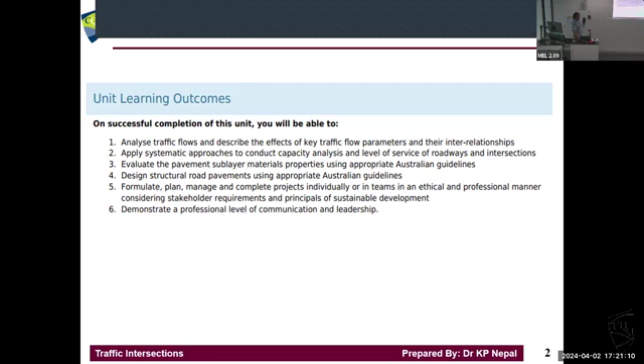What we did until today is we finished our uninterrupted flow analysis, right? Level of service, capacities, multi-lane roads, and two-lane highways. From today, we will start the interrupted facility. We will be designing and analyzing intersections. Designing is a little bit easy, I don't cover that, so I will go for the analysis. So let's learn quickly about intersections first. In terms of learning outcomes, intersections are part of our analysis.

So what we cover is we try to understand what are the types of intersections. Of course, we have seen, right? We have traveled along the roads. We need to understand the traffic conflicts because they are so important to predict crashes, right? Yeah, road crashes and accidents. And then a little bit of the layout process and the sight distance requirement as well as operational analysis.

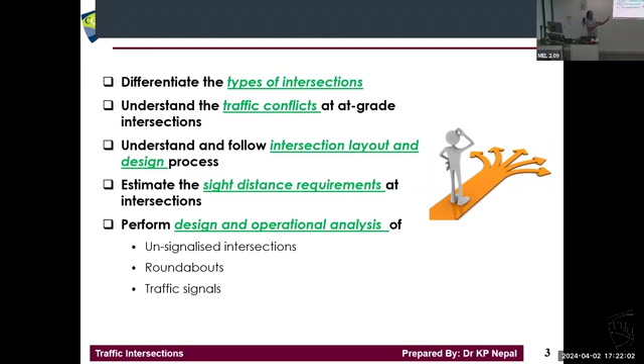So unsignalized intersections, roundabouts, and traffic signals, right? So we will cover only unsignalized intersections this week, and traffic signals and roundabouts we will be doing in week 6. After that, we leave traffic and go for pavement design. Is it good? Yeah? Let's go.

All right. What are intersections? How do we define them? When two or more roads meet at one place. Sometimes they cross, sometimes they just meet. So why do we need those? Because we need the change in direction of the traffic. They want to go left, they want to go through, continue, right? So we need the intersection to change the directions of the flow of traffic, from one to another.

So intersections, in America they call them junctions, right? That's why I put that as well, the terminology. It depends on how many roads are joining, how we design and analyze. Also the type of control: roundabout, signals, unsignalized. And then how we treat the right turning and left turning movements, and if we put a little bit of barrier in between to separate different types of traffic flows.

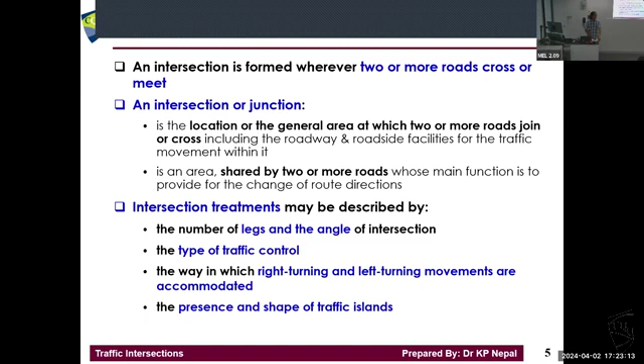We need intersections, right? In the cities, the intersections control the overall capacity. In the rural areas or on the freeways or highways, traffic flow on those uninterrupted facilities controls the capacity. So in the cities, of course, at one intersection you stop and then go to another, and we want all intersections to move very smoothly, but it's not always possible because of the traffic.

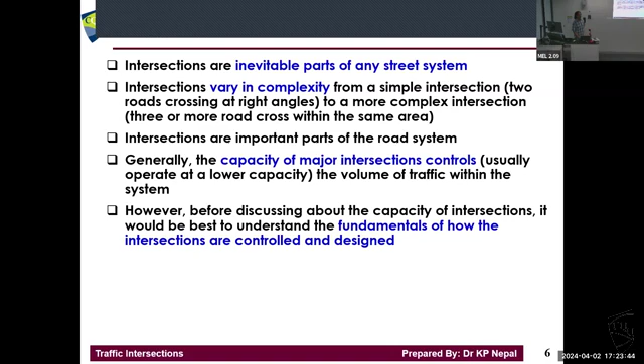So next is at-grade intersections. Depending upon the number of legs, we call it a cross intersection, where they cross at one place. T intersection, or the Y intersection, when one road meets the other, and then multi-leg intersections, where there are more than 4 roads meeting. That will be complicated. For safety, please don't design those types of intersections. It's really bad. More than 4 roads coming is not good.

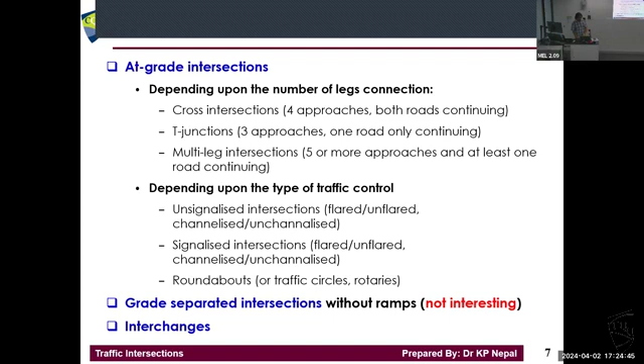Depending on the type of control: unsignalized, there is nothing, just a give way and right of way rule. Next is signalized. We have signal indications, green, red, and yellow. And then we have roundabouts. In America, they call them traffic circles or rotaries. Those are the terminology; we call them roundabouts here. That's the first. And then second is grade separated intersections and interchanges.

These are at-grade intersections, right? At the T, one road is continuing, another road is just meeting. Why? Oh, please don't do that. Why is that not good? Because of the sight distance and turning. It's so hard. For example, coming from that, turning to that would be really difficult, right? So try to make the angles as close to 90 degrees as possible.

Sometimes with the cross intersection, make this angle 90 degrees. Even at 40, make it 90 all the time. Either 90 or don't make it too low. Maybe in Australia we say more than a 60-degree angle is okay, but oh, come on. That depends on the safety objective.

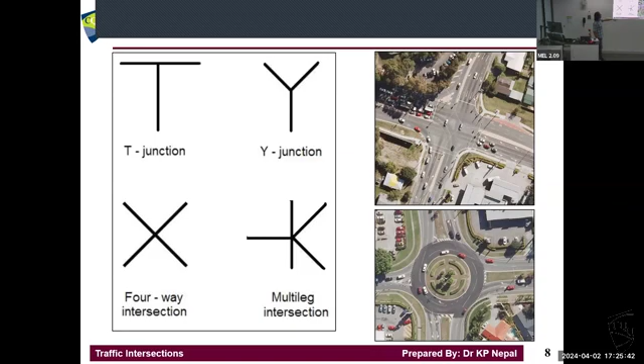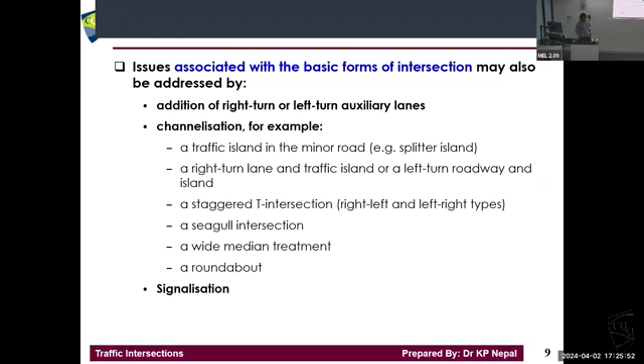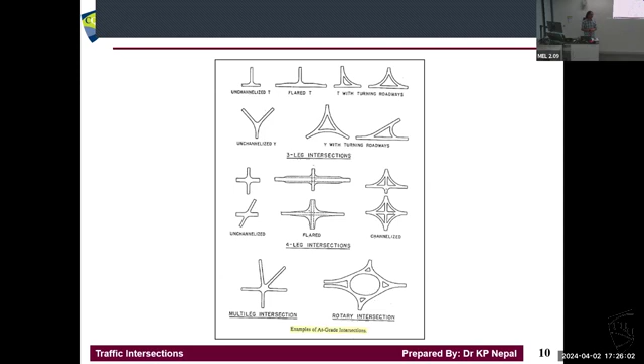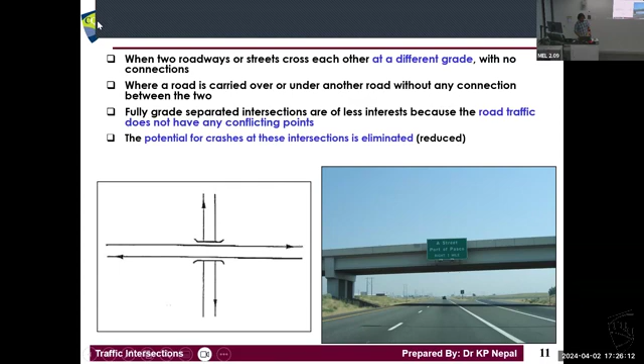All right. Second type, we call it, why is it not showing at the top? Something is blocking, yeah? No heading, right? Very fun. It's coming. I think it's not perfectly sharing. I don't know what's wrong, but there you go. Somebody put a comment in the chat, yeah? I want to see. Okay.

There you go, right? Grade separation without ramps. Ramps means the connection between two roads, right? To easily transfer from one to another. But if there is no ramp, what is this here? This is just a bridge above another road. We are not interested. Maybe structural engineers are interested, but not us, because there is no traffic meeting, right? It's just the roadway only.

This looks a little bit terrible. I'm not sure where I put that. It's blocking. Did you see at the bottom, as well as when I move to the top, it's also blocking? Yeah, okay. Got this. All right. Let's move on.

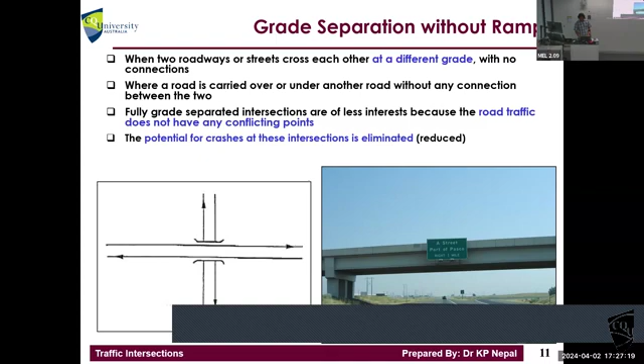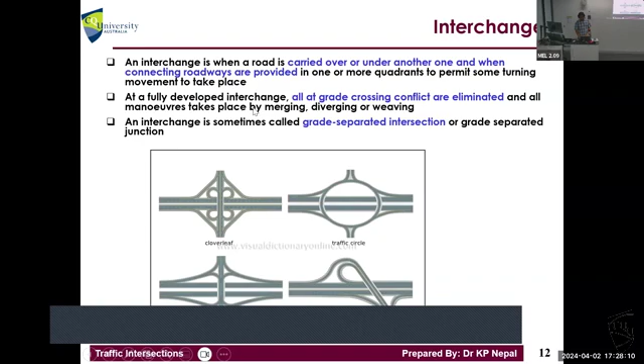These are important for us, but mostly it's structural engineers who need to design the bridges. These are the terminologies for the different types of configurations of interchanges. We're not going into that detail, but we already know about entrance and exit, look at this moving.

Sometimes, look at this, we call these trumpet intersections. When do we use that type? So there is a bridge, right?

You can see there, I want to indicate here, but I can't. I need a mouse. Do they have one? No, they're linked to something. I want to indicate something, but I didn't know this would happen here. If you see here, there is another mouse. What is that? Okay, hopefully it works. Yeah, thank you, I didn't see that. There you go, hopefully it works.

Okay, here we go, there is a bridge, I indicated there, so they are not meeting there. But if there is heavy traffic, for example turning right from there, we try to separate above the bridge, isn't it? It depends on the amount of traffic.

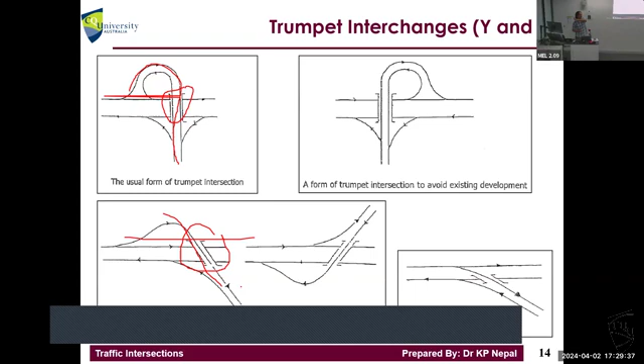So different configurations, for example here, there is a bridge. But did you see here, right turning traffic, they have a direct bridge crossing, there you go. For example, the roads there go above the road and then turn in the right direction. Those type of stuff here.

Okay, so now look at this. Why do we use different types? Can you guess why we separated here, not at other locations? Because these two flows coming from that side, this is also not that good.

You see? Oh, I wanted this. Yeah, from here, look at this, it's so sensitive, it's just moving without me touching it. From that coming down, as well as from here turning right, from the left to right, there are heavy flows there. We try to separate that, otherwise there will be big congestion there.

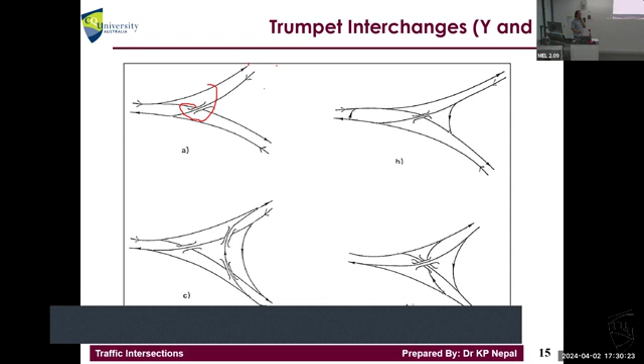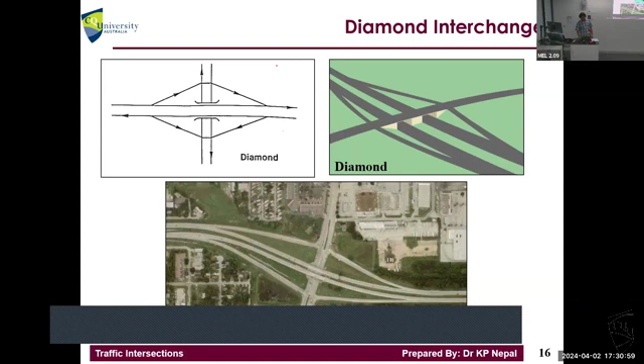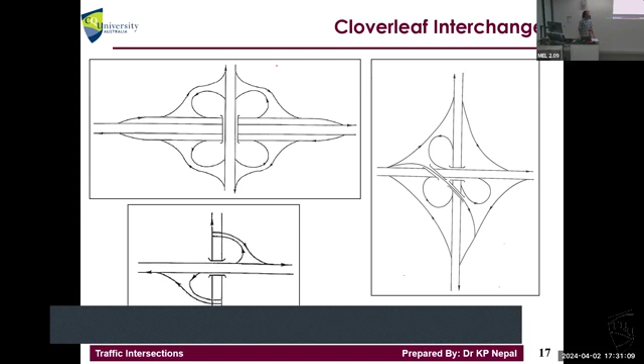You see, cloverleaf is another type. This is the full version, that's only one third, but there is one direct movement above the bridge, as well as other types there. You see how much space we need for that? This allows complete freedom to maneuver anywhere without crossing conflicts. They can merge, they can diverge, but without crossing there. These are just the basic ideas about the type of intersections, alright?

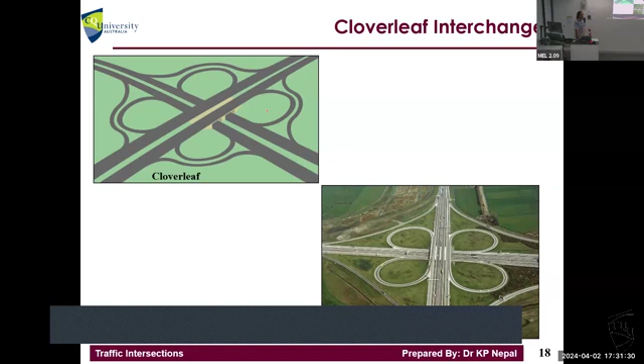Look at this, sometimes we can put the roundabout type in the center to change the direction. So sometimes directly we have, of course, if you go to Tokyo or Bangkok, some very busy cities, it's really, really challenging.

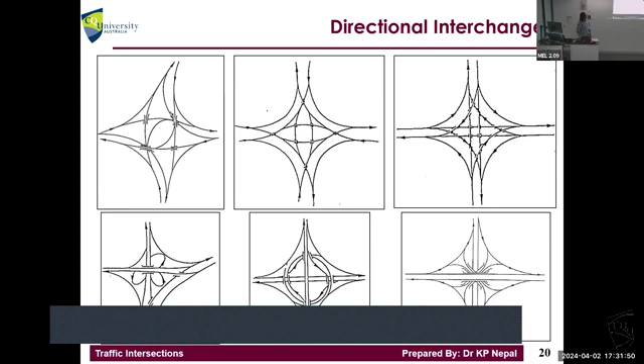Look, I think I have some photos here. I think the connection is not that smooth. Look at this, we can put it anywhere. Why do we need it? Because of the amount of traffic we have.

In this, I think structural engineers have more of a role to play than us traffic engineers, because we just have a road. If we have a road with no crossing, no meeting, then it's easy for us. I wanted to draw some diagrams, but there you go.

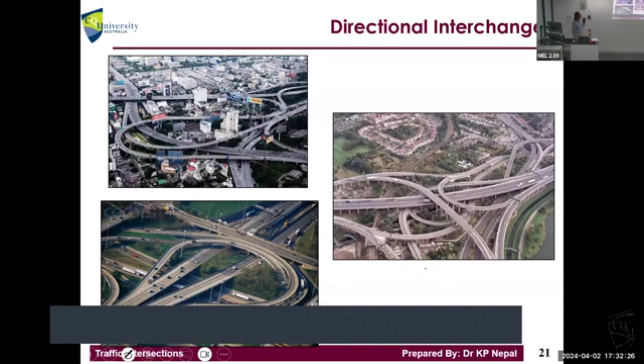Okay, now let's learn about at-grade intersections, where traffic meets and sometimes crosses. We call this conflict. There are 4 types of conflict. One is crossing, when one movement crosses another - it can be a slight angle, or they need to cross directly.

Another is merging, when two traffic streams come together into one. Diverging is when traffic that was before one stream goes in separate directions. And weaving means what we learned about weaving flow in the 3-way merge. So now, why do we study conflict?

Because they represent crash potential. I have drawn the conflict map of a 4-leg intersection shape - how many? 16 crossing, 8 merging, and 8 diverging conflicts.

Your exercise: can you draw a similar map for the T intersection? Can you try? What happens - I can't draw here, this isn't connected well.

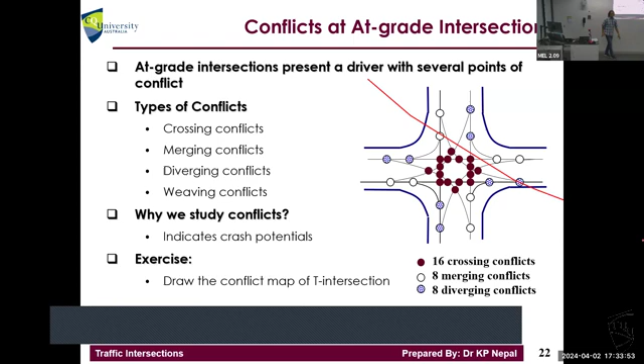Anyway, can you draw the conflict map? Just draw the T intersection first. Let me try something here - I'm not sure, oh that's here anyway. Okay, can you see that?

So how much is reduced now? T intersection has only 3 crossing points in the center, and 3 merging and 3 diverging. How many were in the cross intersection before? 16, 8, and 8. Now the T intersection numbers are so much lower - you see, T intersections are a lot safer than cross intersections.

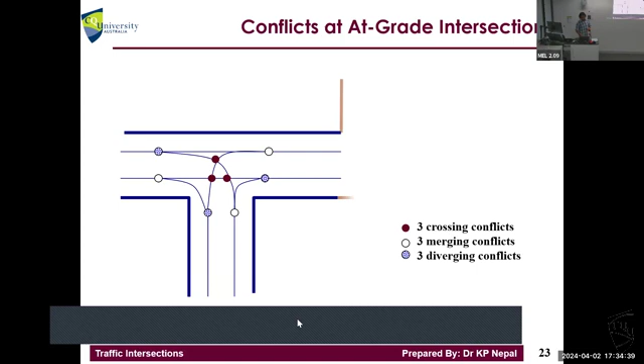If you design a suburb anywhere, new or old area, please don't design cross intersections. It's better to have 2 separate T intersections - they are better. I have a map here, did you see that next? Look here - for the cross intersection I wanted to do practice here, but I can't now.

So 16, 8, 8, right? Over here, even if we have 2 separate intersections, we have 6, 6, and 6. That means less chance to have a crash. It's the same thing - if we connect that, all movements are allowed, isn't it? So why do some people, the developers, not want that?

Because they need to optimize the land - they want more houses. If we have 2 intersections at 2 different locations, developers try to avoid that, but local government in Australia has rules - there's a maximum number of cross intersections you can design in a suburb. You can't have more than that. You need to have T intersections most of the time, or a roundabout - though a roundabout requires more space.

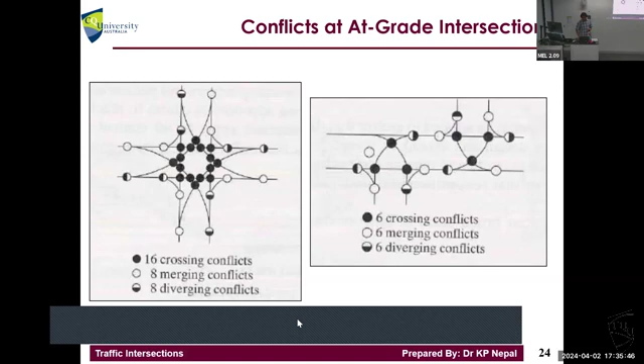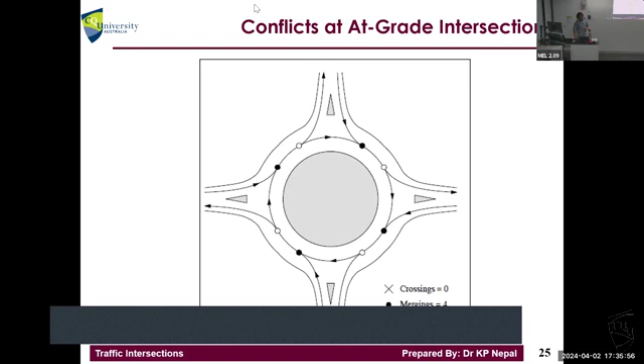But they are the safer option. I will show you here - roundabouts. If I draw the conflicts, I think it's better to move this up, so it's clearer than the bottom one. Here you go - no crossing conflict. In a roundabout, we don't cross at all, we just merge and diverge.

4 and 4 for the two roads joining together, so roundabout is the safest one. Roundabout is the best, but it requires more area. T intersection is the second safest, and cross intersection is the third. I try to avoid cross intersections in design.

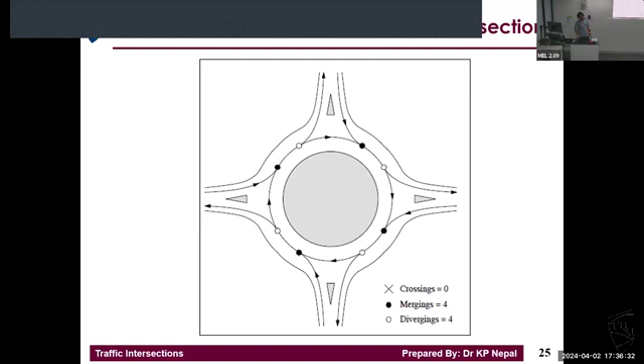Come on, move - it's not moving. There you go. So why? Another important thing is relative speed.

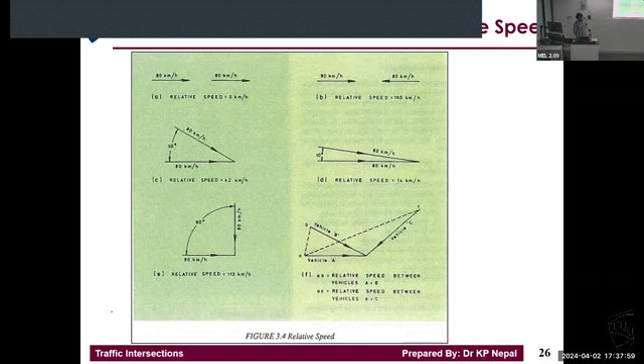So we try to - in the roundabout, have you seen that? They curve like this, right? For example, if you go from one direction and try to make that curved path - why? Because we are trying to make the angle as small as possible. One thing is reducing speed, because people drive stupidly fast, but another thing is we try to minimize the angle between two streams of traffic. Okay, this is some of the data - very old data.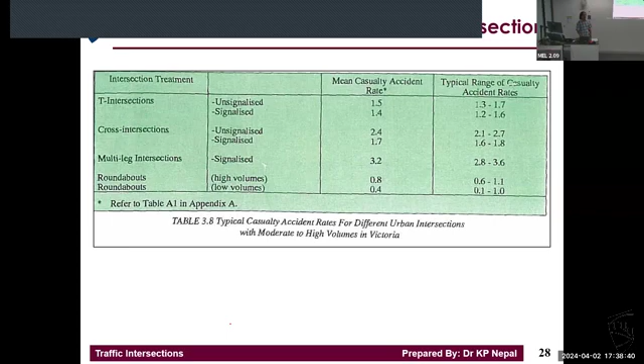I think that's it here. There is a little bit of background, we'll do the problem first. Discard that. Now, what did they say? Stop share. Anybody remember what they say? And then screen share again. I have the main thing. Okay, I can't remember my Zoom ID.

Please guys, I can't do it here, so you need to do it, right? I'll tell it verbally, I don't know how much I can cover. I'll repeat again on Friday, yeah? But we need to learn this, how to design and analyze unsignalized intersections, right?

So, types of control for unsignalized: uncontrolled, just have an intersection, let them drive based on the rule without anything. That's the first, right? Second is two-way stop control, because there are two roads crossing. One is the major road, the big road, another is the small road coming in. That means the small road, the minor street, minor street traffic needs to give way to major street traffic. That's what two-way stop control means. Sometimes there's also a four-way stop control intersection.

Have you seen where all directions stop and give way to pedestrians? Yeah, in the city center sometimes, right? Every direction stops and gives way to all, you see the pedestrian crossings, if you have a big pedestrian area they also do that. But the most common is two-way stop control, which is what we will be learning. In your assignment, you will be doing that.

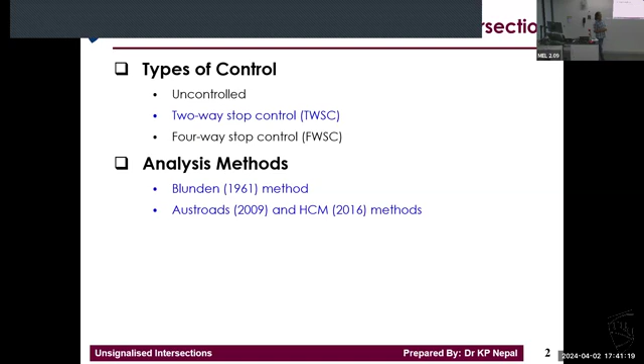So there are two methods. It started from 1961, the Blunden method, and then moved to Austroads and the Highway Capacity Manual 2016. These are newer, so I have combined them all and made a very good sequence, hopefully you get that, of how we do the calculations to analyze the unsignalized intersection. We will only be learning the two-way stop control intersection. That's what we did last time in our lab using SIDRA.

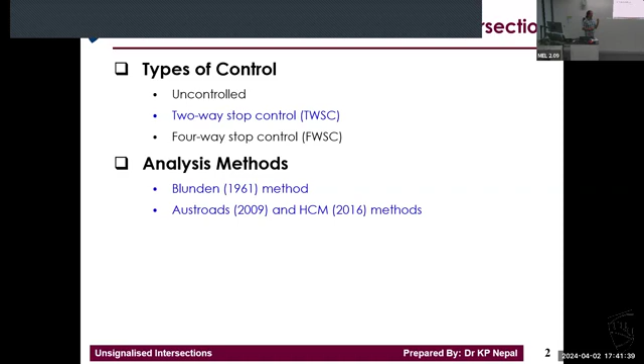Okay, let's do it manually here. So this is the Blunden method, the first method. Look at this: capacity depends on the flow on the major road, because the major road traffic can go anytime. The minor road needs to see a gap in the major road traffic. So how many minor road vehicles can get into the major traffic is the capacity.

We assume that's a Poisson distribution, probability theory, a little bit, yeah. Of course you don't need to remember it, but there is an equation, right? To compute the capacity, you need to find the conflicting flow, and you need the critical gap. Let's talk a little bit about it.

If you are waiting on the minor road, and traffic is coming on the major road, right, just give me the idea: how much gap do you need to get into the major traffic? There are three ways of getting in: crossing, turning right, and turning left. So how long a time do you need? Just a guess.

How long a time gap between two vehicles in the major traffic do you need to get in? It depends, right, on the situation. What we call that is the critical gap, so TC is the critical gap. Follow-up time: if two vehicles are waiting and there is enough gap there, then what, both of them go at one time, right? Follow-up time would be a little bit shorter than the critical gap. So these are the variables we need: critical gap, follow-up time, and conflicting flow, to calculate the capacity.

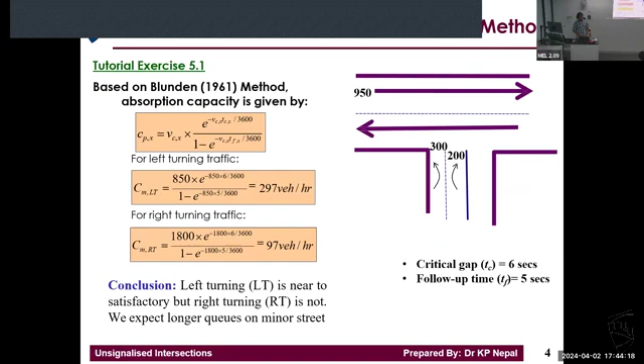Okay, let's learn about this, right? Look at here, oh, here you go. I don't want that. So can you write, can you sketch this intersection now? That was the one missing. It should be 850 here, coming from that direction.

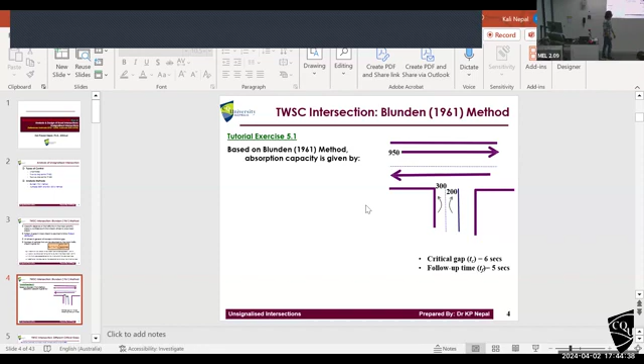Look at this. I want to explain this, all right? We need to understand this fundamental route, okay? That's 850 there. Okay, what that is. So, can I explain that? There are two lanes from the minor road. Major traffic from east to west is about 850 vehicles per hour, and from west to east, 950. It's a T intersection, and there are two lanes on the minor road. These guys need to give way to the traffic, right?

Let's start from right turning traffic from the minor road here. Who do they need to give way to? You try, tell me. So these 200 guys are waiting there. Who do they need to give way to? Which one? 850 as well as 950, right? Because they are turning right. The total is what we call the conflicting flow.

Can you write? The first case is right turning traffic from the minor road. So they would need to give way. So V must be 950 plus 850. How much is that total? 1800 vehicles per hour. So now we need TC, given as 6 seconds, and the follow-up time is given as 5 seconds, right?

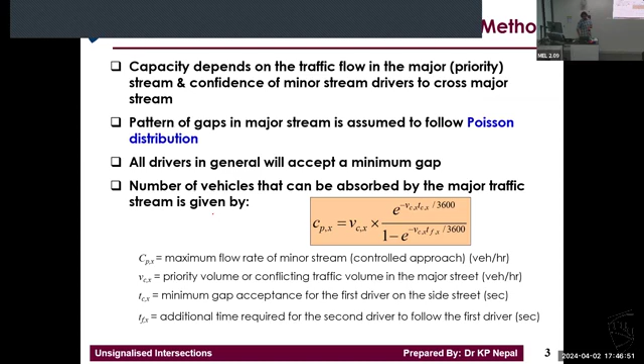Come on. Can you calculate now? How much do you get? Just put the values in. So 1800 times e to the power minus 1800 multiplied by 6 divided by 3600, over 1 minus e to the power minus 1800 times 5. How much did you get? 97. How many are turning right in the incoming traffic? 200. So the capacity, let's say 98, right?

What happens here now? What that means is only 98 vehicles can get into the major road in 1 hour. But there are 200 vehicles coming to the intersection. What happens? They queue, right? There will be a queue there, and it keeps going. It's a lot. Can you do it for the left turning traffic as well? Let's do it for 300.

So this is not a good design, because cars will queue up here, and it's building. Incoming traffic is more than the capacity. So that means they stay behind the queue, and then the queue will increase and increase, right? It will not stop.

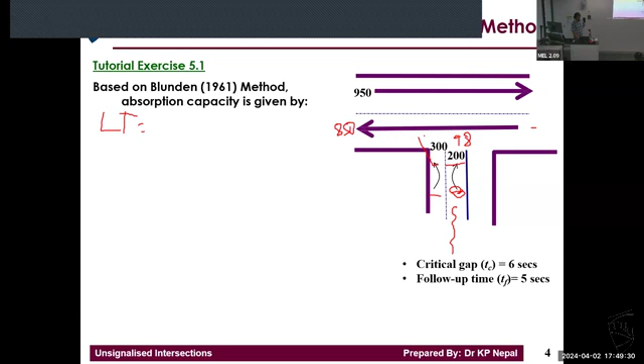So 297 means what? Very close to 300, right? So how many vehicles are coming in? They are getting in, right? So the capacity is very close to the incoming flow. Of course, there will be a few vehicles in the queue, but that should be okay, because the capacity is okay. Level of service may be E or something, but it's all right. So there is another one.

It's okay. All right, yeah. Let's go through. I'll do some problems again on Friday when I have a paper to write.

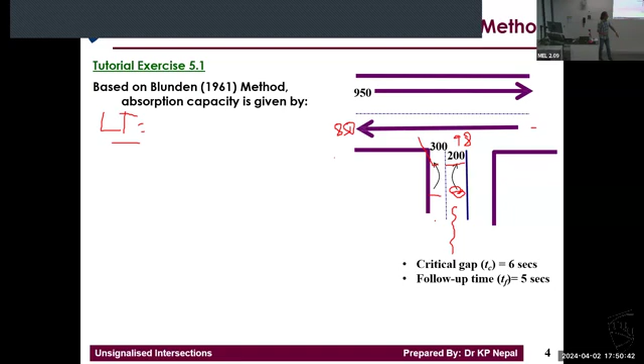There you go. So sometimes what happens is, in this problem, it's such a simple problem, right? Critical gap is 6 seconds, no matter left turning or right turning, either car or truck, we don't know anything, right? But this is a very simplified case. When it differs, we need to use a different equation.

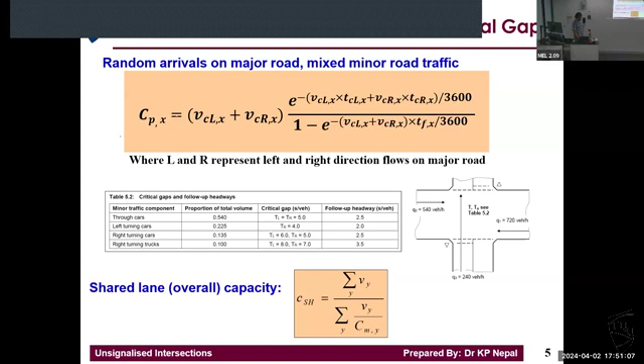Let's move on. So let's start our design process, the analysis process. This is just giving you the idea of what capacity means. Capacity of an unsignalised intersection is not the capacity of the minor road. It is the capacity at which minor road traffic can get into the major road traffic. So in Australia, in 2009, we have the Austroads guide.

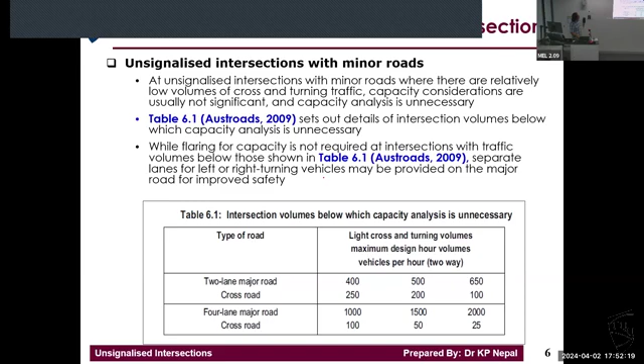Depends on, look at this. Major road has 500, reduced to 200 on the crossroad, right? 650, 100. So they give a little bit of indication for quick observation. But most of our roads are more than that for sure. So I will go through the HCM 2016, right? That's the one.

And then SIDRA Intersection, you guys have already had a little bit of exposure to it. Friday, hopefully we can do a little more. Please bring your computer for SIDRA so we can connect. Some we have in the room. I have asked them to install it, but they may take some time.

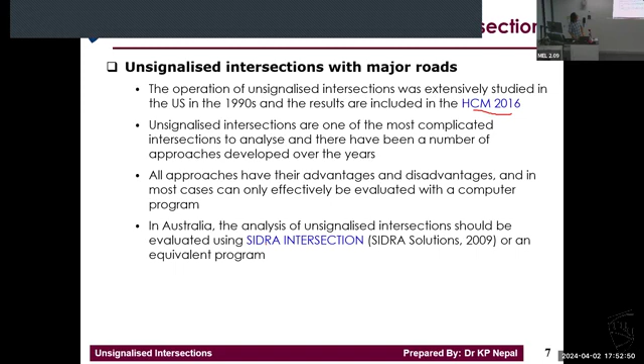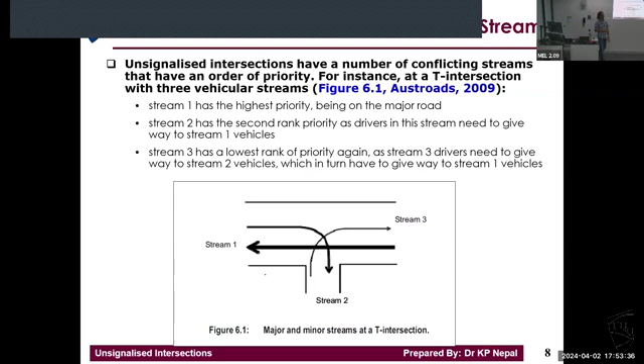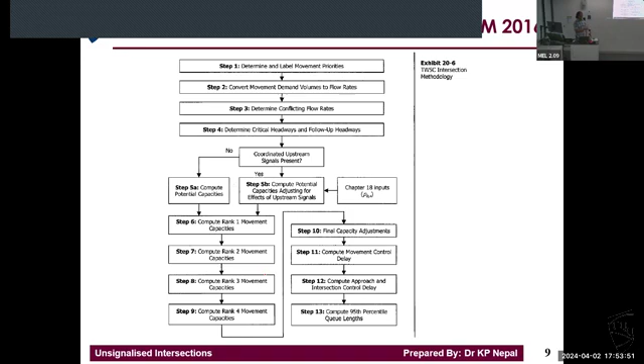And then rank 3 is that one, right turning from the minor road. Why? Because they need to give way to both of them. You see, we need to rank the movements first. I think you have used that in your driving; the same rule applies all the time. Look at the flowchart again. I'm the flowchart man, so we will follow this strictly. I put in separate steps now.

Step 1, label the movement priorities, rank them: rank 1, rank 2, rank 3. Number 2, convert demand volumes to flow rates using the peak hour factor. Third, conflicting flow rates. That's the V we just calculated. If somebody needs to give way to some streams, add them all together: that plus that plus that flow, you get the conflicting flow.

Estimate critical gap, that's tc in our problem, and then follow-up time tf. How do we estimate? We use the standards. We have 3 standards: Austroads, the HCM, the US one, which are closely similar, and SIDRA, which gives other values. That's the reason why the values we get from SIDRA don't exactly match our manual analysis, but they are close enough.

Move on. Critical gap and then potential capacity, the same equation we used before. Now you have conflicting flow, tc and tf, so you can calculate the theoretical capacity. Now, movement capacity, applying corrections, is really complicated, so adjusting the theoretical capacity we will not cover in this unit. And then final capacity adjustment.

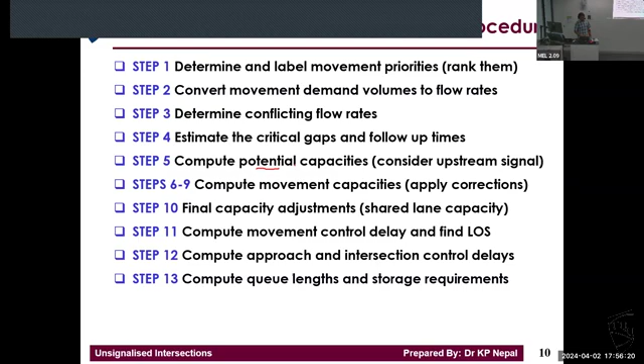Step one now. This is the problem. Ranking. Okay, let's understand this. So the first one is a cross intersection, the second is a T intersection. All right. Here from north to south is the major road, right? That side is the major road. And then the other side is the minor road. So always, I think I discussed a little bit about SIDRA and numbering. Please number this way, right? Same sequence, so it will be easy.

So 1, 2, 3, and 3 U-turn. Third is U-turn, and then 4, 5, 6 on the right, 7, 8, 9, and 9 U-turn. And then 10, 11, 12. These are the numbering of the movements. So if the major road is north-south, who goes first without giving way to anyone? Movement number 1, left turn. You are in the major road, you can left turn at any time. Number 2, yes. And then also number 7 and number 8.

And these are the pedestrians, right? 13, 14, 15, 16. So if the major road traffic goes, then 16 and 14 also can go without giving way to anyone. That's rank 1. So we will not use the analysis for rank 1 because they can go at any time they wish. That's not our interest. There is no capacity calculation for rank 1 movements.

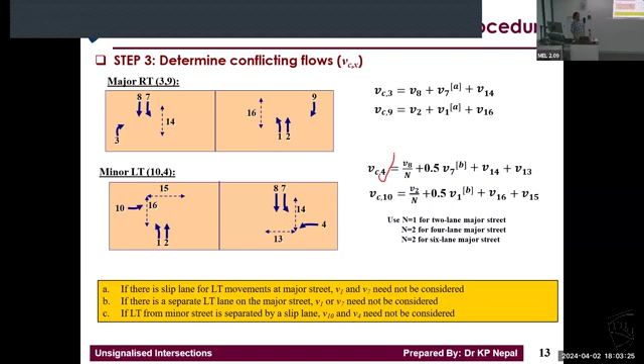So N means number of lanes. You use 1 for a 2-lane major street, that means 1 lane coming, 1 lane going. You use 2 for 4-lane, and you also use 2 for 6-lane because, based on observation, total traffic is not equally distributed in all lanes. So also 10, same concept. Who is next in line? 4, 10 done. 3U and 9U.

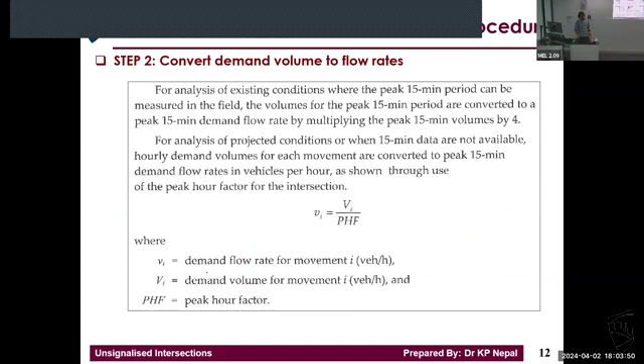Who do these U-turning guys need to give way to? Number 8, for sure. And then how about 7? So that's the equation there. It depends on number 8 and 7. If there is a slip lane, we don't need V7. If not, then just use K equal 1 for 4-lane major street, K equal 0.73 for 6-lane street, and use the equation.

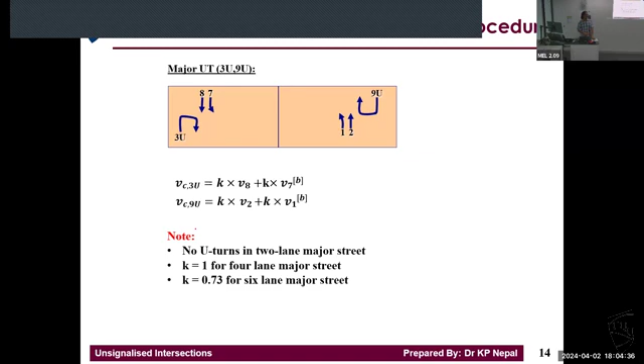U-turn is not allowed for the 2-lane major road. Why? Not enough space to U-turn, only 1 lane. How do you turn back onto that road? Have you seen U-turn not permitted signs, crossed out on the way you drive? Because you are not able to do that. Of course, some people do, but that shouldn't be the case. All right, next.

Who goes next in the ranking? 5 and 11, what are they? Through traffic from the minor road. Who do they need to give way to? Number 5, let's start. Almost everything, except 6 and 12. But there will be 2 stages. In the first stage, up to the center of the road, they give way to all of those guys there. In the second stage, there.

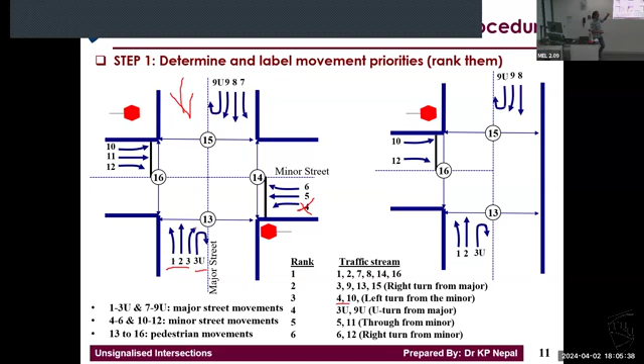Sometimes in the center there is enough space to park your car, so you need to do a 2-stage separate analysis for that. But if there is not enough space in the center of the road, then they must go at one time, from both. Interesting, isn't it? How we do our driving, that's all in equations here. We try to represent that in equations.

Look at the equations I have written there. Look at 5. So first they need to give way to what? Did you see the double here? If they share a little bit of road together, the right turning from the major road and the through have a lot of conflict there. So that's why we double it.

And then 7, we don't need to consider 7 if there is a slip lane, right? Yeah, otherwise half of it and all of it, and then you turn, and the right turning and a little bit of pedestrian's path. The single I means first stage, and the double I means second stage, and then for the single stage, we have them together.

It's good. At one time, if they need to cross, please use these equations carefully. Sometimes you miss and read the information provided. You don't need to memorize, but it's not hard, just a conceptual one, right? Who then needs to give way. Sometimes a little bit more overlap, we double it. If conflicting, whether they are indicating or not turning left, then we half it. All others are very simple.

How you feel? Is it okay? Equations all good? All right.

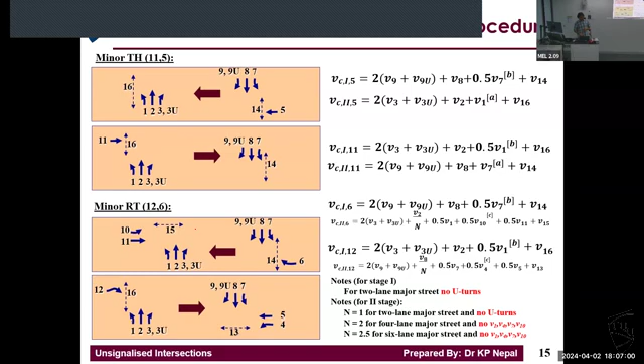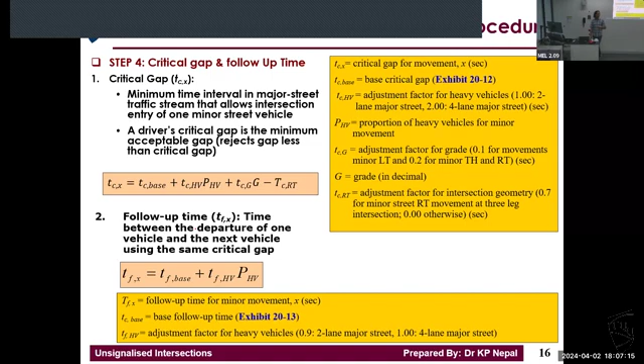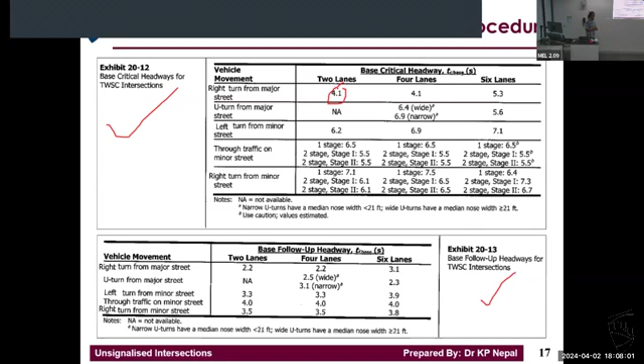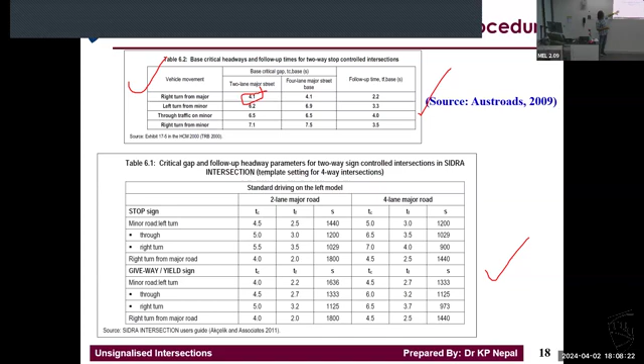Please, for your project or assignment, use the Austroads data, Australian guide data. Don't do SIDRA. SIDRA has so many different varieties and classifications. They calibrated models a lot along the Australian traffic conditions. That's why just use the simple Austroads guides. Is it good?

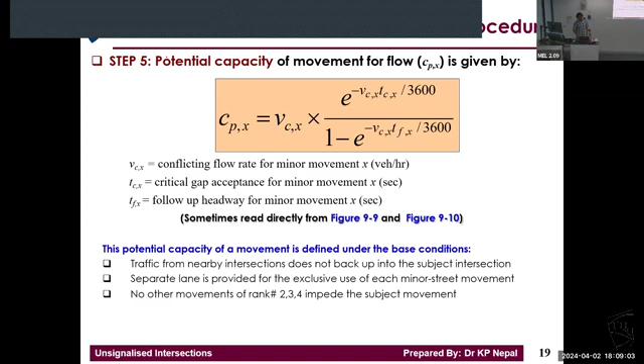What's the next step? Who can recall? So now we need to use the capacity calculation equation. I think you know this equation already. We did that simple calculation, right? We need to do this for all: number 3, 9, 4, 5, 6, 10, 11, 12. Only what we don't need is 1, 2, and 7, 8. Why? Because they are the top priority. We don't need to calculate the capacity. Move on next.

All right, adjustment. This is so complicated, so I just removed that. So we just use the theoretical capacity. It's all probability theory we'd need to cover, and take another 3-4 weeks. So corrections are not covered in this unit, but you can refer to the Highway Capacity Manual if you need to when you practice.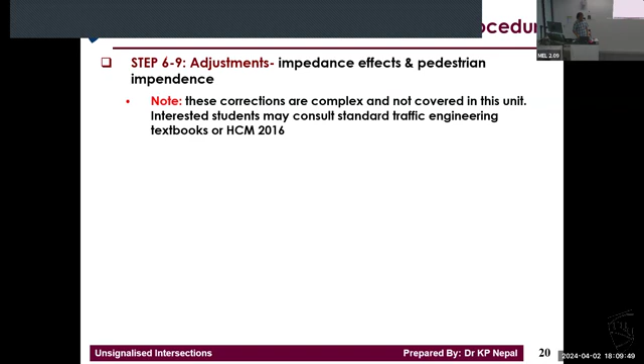But if you know this theoretical concept, you will be doing it in practice as well using the software. They already include those types of corrections. So don't worry about it. That's the reason I try to avoid that complicated mathematics here. I think it would be about maybe 40 pages of math required for that. Here we go. So next.

Now, until now, the capacity we calculated assumes there is a separate lane for left turning, a separate lane for right turning, a separate lane for through. But on the minor road, there will not be 3 lanes. There will be 1 lane coming, right? Right turning, left turning. So we need to use this equation to compute the shared lane capacity. This is nothing, just the weighted average.

So how do we calculate this capacity? Usually we take 80% of the theoretical capacity as practical capacity because we didn't apply so many corrections here. So that's why I take about 80% of the theoretical capacity as the capacity of the intersection.

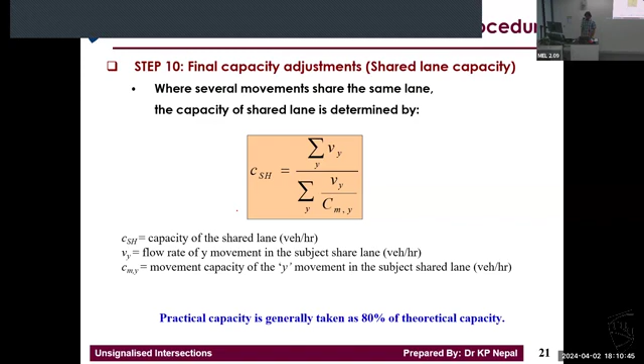What next? Delay equation, that's the equation to use. You are good engineers, so you can put the numbers in. We already have capacity. What else do we need? We need the conflicting flow. You need the time interval, 0.25 for 15-minute analysis. Every value you know to compute this equation.

Why? I don't know why they use this complicated equation. That's why they also provided a graph, if you want to read it. This is the graph we can use to get that.

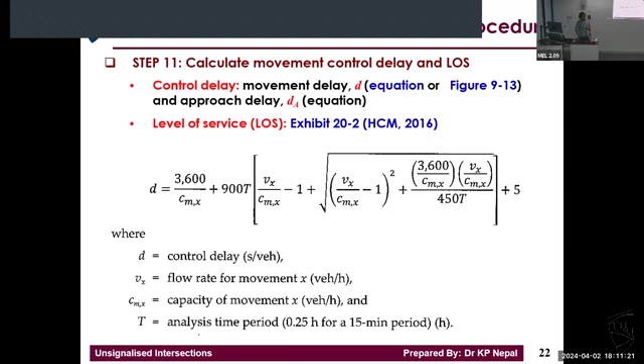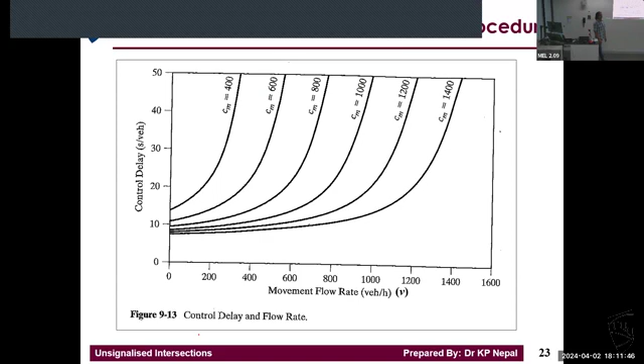We will get the same values, right? Control delay calculation. If you use the movement flow rate and go check the graph, you will directly read from here. But for your assignment, guys, use this equation. In exam situations, you can also use the graph to quickly get those values if time is not enough.

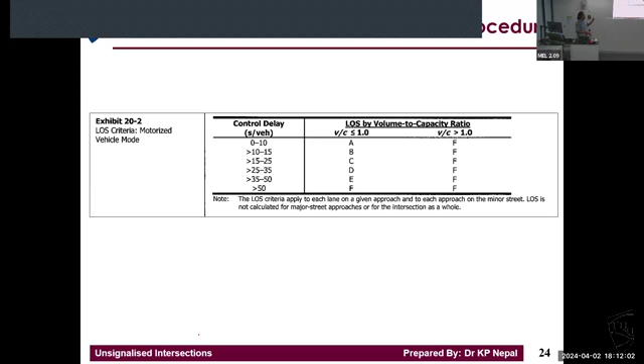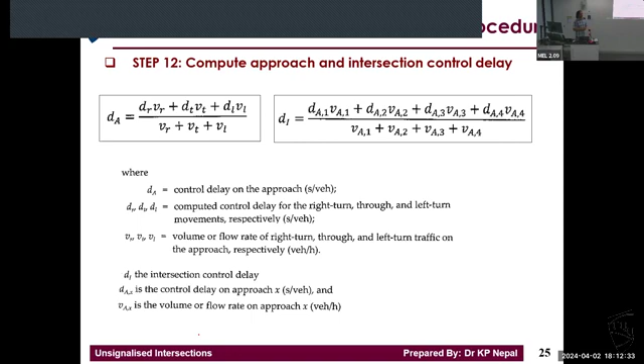Then level of service is based on the delay we just calculated, and we classify what level of service that particular movement is doing. Each movement will have a separate level of service. But we can also calculate the delay for the whole approach as well as the delay of the whole intersection - this is just a weighted average. We have delays for each movement (turning left, turning right, going through), the delay of one side of the road which we call an approach, and the delay of the whole intersection. So we can calculate and classify the level of service of that intersection.

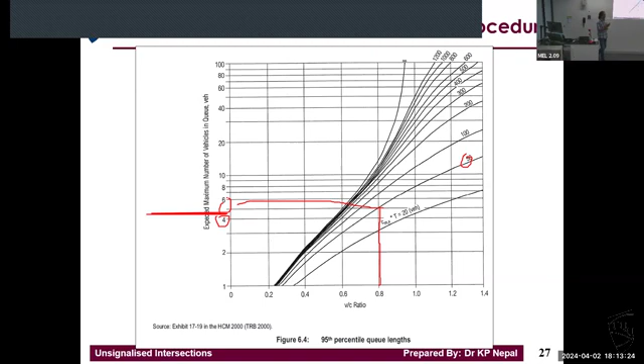What that means is, let's say the capacity times 0.25 gives 50 in that case. And if the v/c ratio is 0.8... oh, that's the wrong number I checked. That's 5 vehicles that will be in the queue. So that's how we can directly read it. But if you use that equation, it gives a much clearer answer - better to use the equation instead of reading the graph, in assignments.

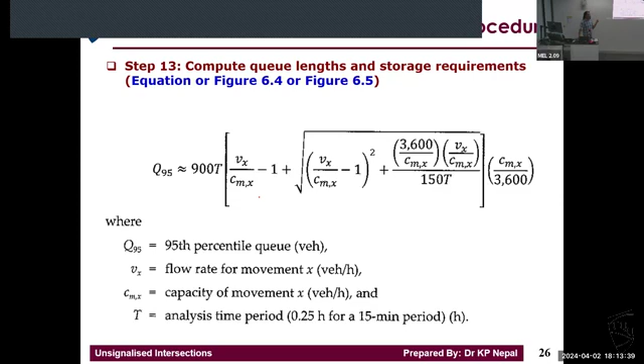Even for your report, when you work and calculate, use the equation - be an engineer, use that instead of the graph. But there is a graph for quick reference. They have also simplified another way: if you have the utilisation ratio, meaning what is the incoming traffic on top, and the bottom part is how much capacity.

So if you get the ratio, let's say the ratio is 0.4 - where is my indicator? 0.4, right - in that case there will be 3 vehicles if you want to be 95% sure, and there will be 4 vehicles in the queue if you want to be 98% sure. So that's a random thing, it's all probability, there's a chance involved.

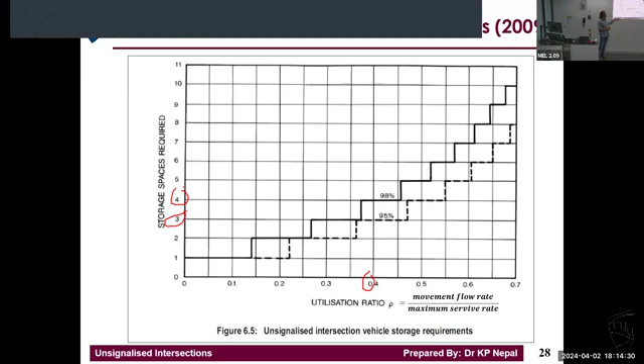So that's the whole process we cover - this is the exact process we need to cover. What I'll do is, because I need to write, I'll stop here, and we'll solve this problem step by step, one by one, calculating numbers and things. This is to come on Friday. After this, we'll do the traffic roundabout for SIDRA.

That will be all right. Sorry for so much disturbance here today. Also, I believe if this room issue continues, I cannot use it, so I'll do it online. But I'll talk with them and let you know with some message.

Any questions for me? How easy is the unsignalized intersection analysis? Why did I use this example? It covers everything, right? Sometimes what happens - you don't have so many legs, and if you have like only 3 legs, it drastically reduces the problem and becomes very simple. If there is no right turning, many equations are already gone from that. So I did the complete one, then in test situations we can just reduce to very small - only through, only left, only right - not these full 12 movements we need there.

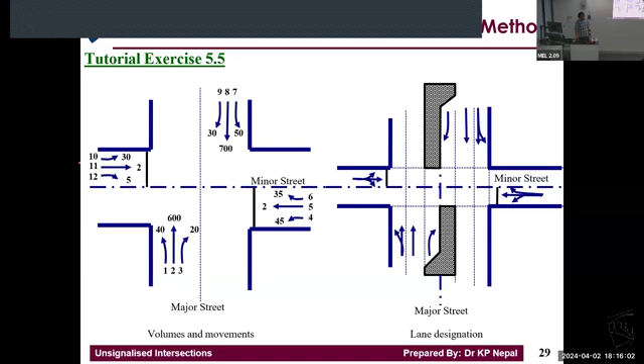All right, so let's do the remaining one on Friday. Okay, thank you guys, yeah yeah. If you have any questions you can ask - not only about this, anything in my unit.

Okay, so just the theory - I wanted to do problems, right? Let's do that Friday. Hopefully it will be a little better than this.